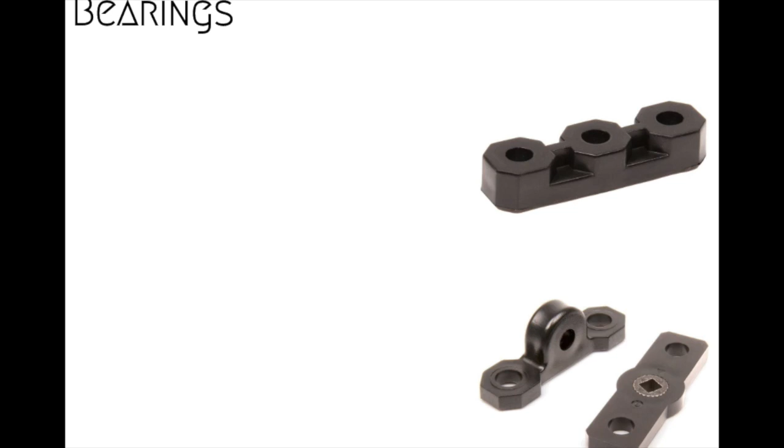First off, there are three kinds of bearings that we talk about on a regular basis, and these bearings are what's going to hold things together for you. So those are Delrin flat bearings, these large ones. They're all about the same size, but they have three holes in them. The holes are round, so what they allow you to do is put a screw through them with a Keps nut on the back and hold them to a metal piece. It supports a shaft which would go through one of the holes, and the other two would be screwed into the metal part, holding it perpendicular.

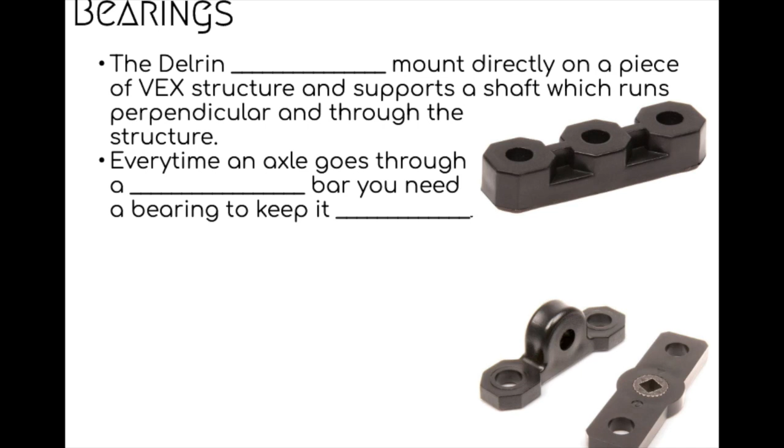Then, basically every time there's an axle that goes through any metal part, you're going to need a bearing to keep it steady and sturdy. Otherwise your axles will wobble. So every time an axle goes through a metal part, you should have some sort of bearing there to support it.

Pillow block bearing mounts, or pillow block mounts, are these guys right here, and they support a shaft off the structure. The screws would go through the two side holes and the axle would go through the center. This has round holes so that the axle freely turns inside of it, which is obviously what you want. It will support an axle so that it's a good half inch or so away from the structure, but you can still keep it from wobbling.

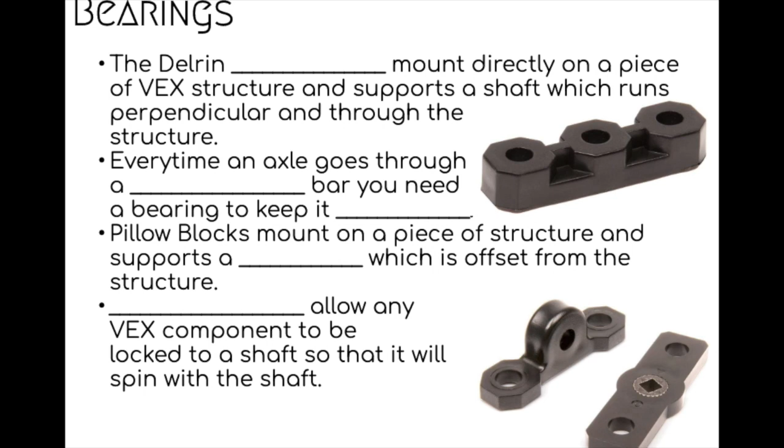And then there are these lock bars here. Notice the lock bars have a square hole in the center, and the reason is that square hole allows them to actually lock onto a shaft or an axle, so that whatever you attach the lock bar to will actually turn with the axle itself. So you can, for example, attach a metal piece to the lock bar, and then the metal piece will spin when the axle spins, and it will stop when the axle stops.

So we have a whole bunch of different kinds of screws. The primary ones we use for building things are called the 832 screws. They are used for assembly of structural parts. Now, I know the picture shows them as silver. We have some that are silver, we also have a bunch that are black. So just because of the color of the screw doesn't mean that it's one kind or another, because we also have the other kind of screws that are also both silver and black.

I know it gets confusing. You really want to look at the head of the screw. The fatter head ones are the 832s, and they are for assembly. You use a 3/32 short arm hex Allen wrench to tighten them. So what that means is a hex wrench has 6 sides on it, and it locks in like a key. Sometimes they're called Allen keys or Allen wrenches, and you spin that to tighten them.

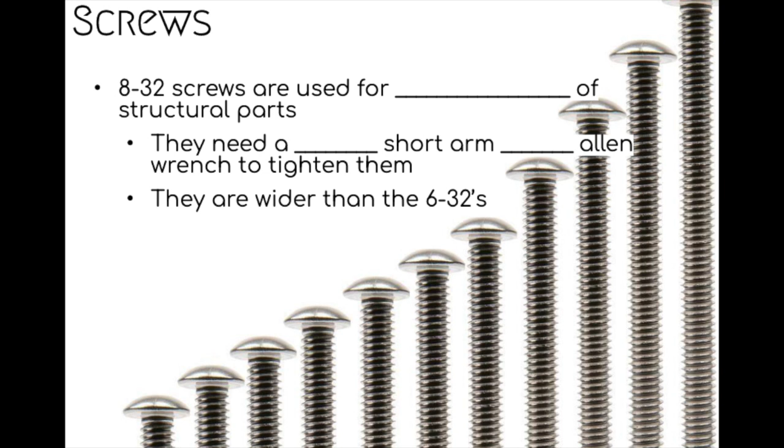And so that's how we tighten up those. They are wider than the 632s. Again, I would look at the head of the two next to each other, you can see the difference. The 632s are actually considered motor mount screws. They're used on motors and the green racks that we have, which have little tiny screw holes in them. Those are for these much smaller screws.

They're thinner than the 832s, and in this case they would need a 5/64 Allen wrench to tighten them. So the 5/64 wrenches that I've bought are the long arm wrenches. So if it's a longer armed wrench, then it's a 5/64. If it's a shorter armed wrench, then it's the 3/32. So 5/64 is the size of the wrench that goes with the 632 screws.

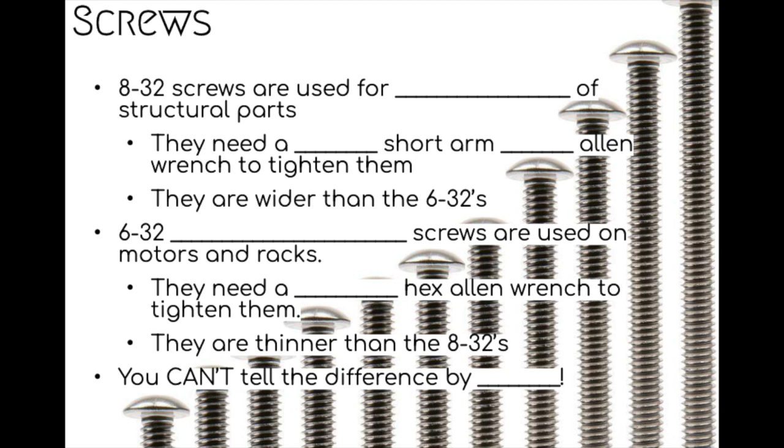You cannot tell the difference between these screws by color. Like I said, we have some silver ones of both sizes, and we have some black ones of both sizes. Unfortunately, you just can't tell the difference without actually picking them up and looking at the heads to see which one's bigger. So there are ways to attach things that don't involve screws.

That would be with these pop rivets. There are two parts: an interior part and an exterior part. When you push the interior part all the way through, it pushes these plastic legs outwards and locks it into place. So when it's on a piece of equipment, it looks like this. You push in from the metal side, which is basically the back of whatever you're doing.

You push it in from the back or the metal side of the connection, and it goes through and locks into place, and the hold's pretty firm. If you notice that they feel really wobbly, it's because you put it in backwards, so use a screwdriver or an Allen wrench to push the center part back out and flip it around and do it on the other side.

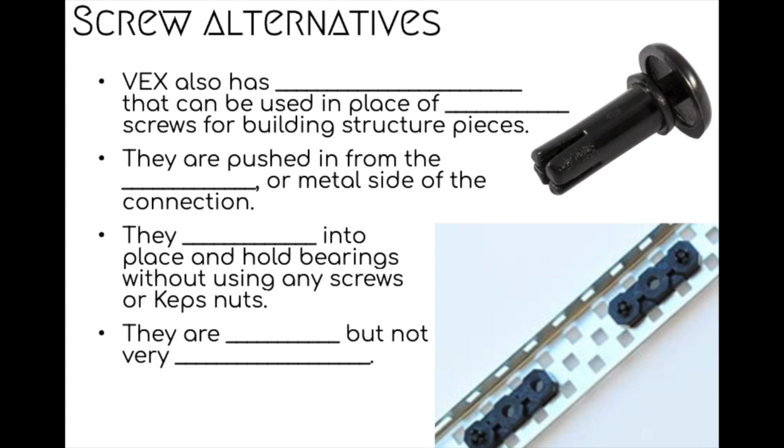So they snap into place and hold bearings without using any screws or any Keps nuts. They are really fast to use, so you can attach things really quickly. However, they don't tend to be nearly as strong as putting something together with a bearing, an 832 screw, and a Keps nut on the back. These should be used in a structure where it's not going to receive a ton of torque or a ton of pulling, so just make sure you're using them in a way that best suits them.

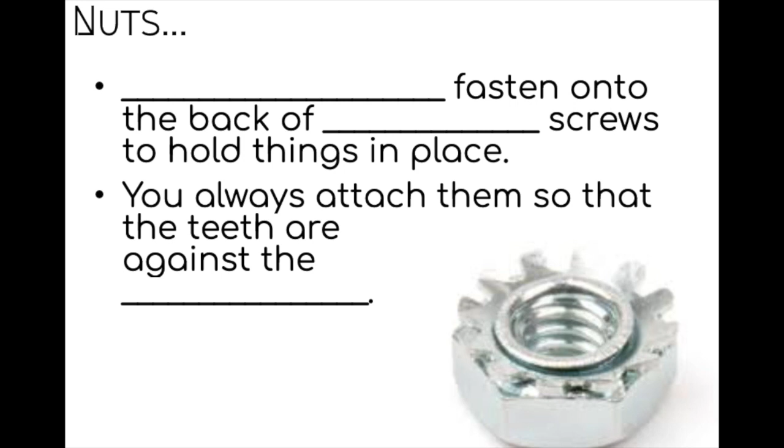Okay, so then we have our nuts. We have Keps nuts, which are used to fasten to the back of the 832 screws. You always attach them so that the teeth are against the metal, so that those teeth are actually correctly gripping the threads of the screw, and the little metal teeth kind of grip the metal back part.

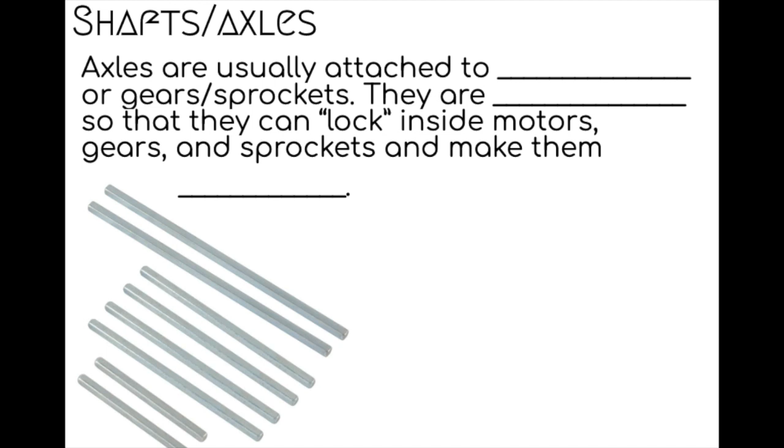So with that come the shafts and axles. Axles are usually attached to motors or to gears and sprockets. They are square, so the ends are not round, they're square, so that they can lock inside of the motors and the gears and the sprockets, and this makes them spin.

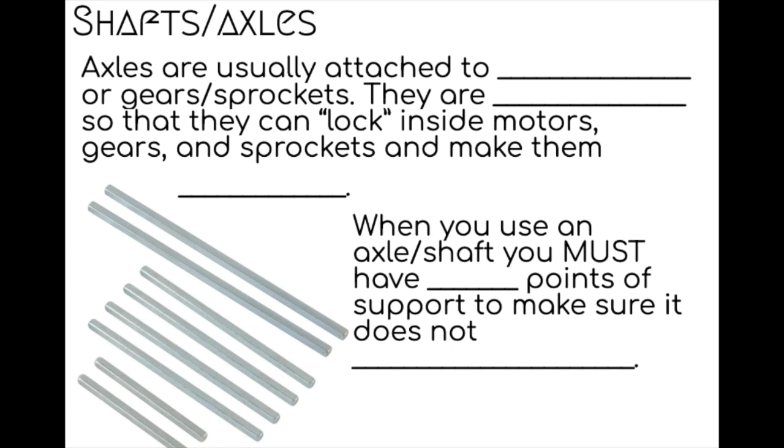When you use an axle or a shaft, you have to have 3 points of support. Remember we talked about that earlier. So it has to go through 3 things in order to make sure that it doesn't wobble, because wobble is bad and your stuff will fall apart.

So shaft collars. Locking shaft collars are the silver ones. They go on a shaft and can be locked into place with a 5/64 long arm Allen wrench, the same one you use for motor mount screws. So the shaft goes through the center. You never put these on an 8-32 screw, it strips up the inside and then it doesn't work very well as a shaft collar anymore.

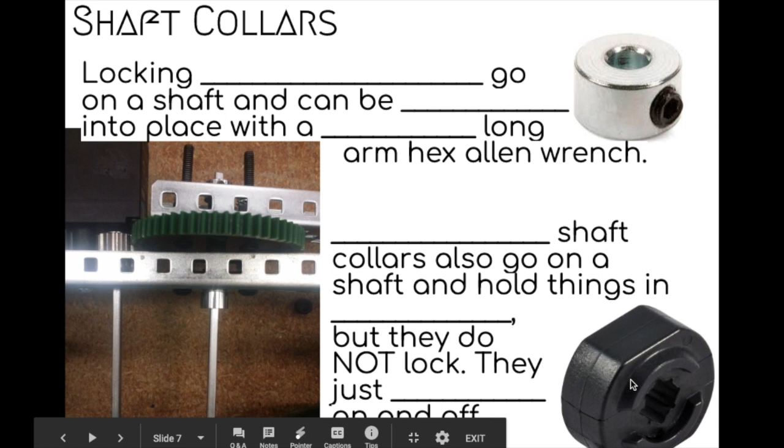You can also use rubber shaft collars. They're actually not rubber, they're more like polymerized plastic, but either way people tend to just call them rubber shaft collars. They also go on a shaft. They hold things in place really well, but they don't lock, so they just sort of slide on and off the shaft.

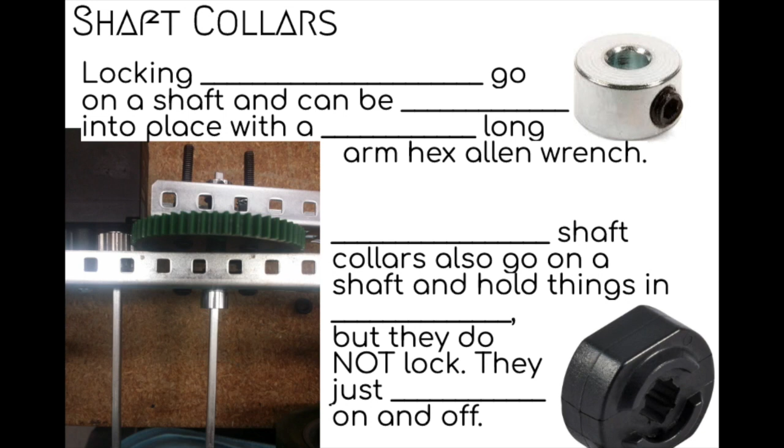So as you can see here, here's a locking shaft collar. If you had one of the rubber ones there, you'd have to be careful because those rubber ones will move around. So if it's going to have a lot of pressure on it, you're going to want the locking ones instead of the rubber ones, but we do have both. The rubber ones are much easier to put on.

So in this case, we're going to ask you if you can see 3 supports in the image. The first one up at the top, we're looking at a motor and a metal bar right there. Then we've got a Delrin bearing right there, which is supporting that same axle, and finally a metal bar and a bearing on the other side. So there are 3 points of support: the metal bar, the bearing, and then another metal bar and bearing to hold it in place and keep it from moving. Now if you look down here, there's a second motor.

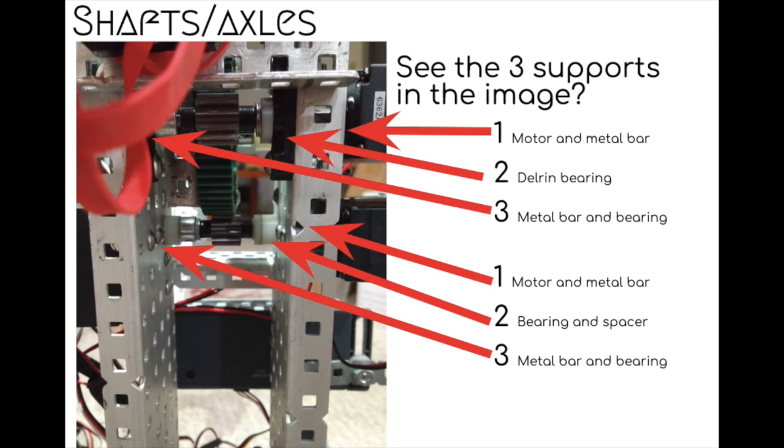Again, motor and metal bar, bearing, and a spacer in this case. They are using some little plastic white spacers, and then a metal bar and a bearing on the other side to hold it in place, and that does a really good job of making sure it doesn't wobble. So those are kind of the basics.

Now we're going to talk a little bit about spur gears, which are these over here. Spur gears basically have teeth that mesh together in order to transfer motion from one axle to another. Then along with that, we have these slightly larger spur gears here. Those are the high strength gears. They are double thick gears, and basically the idea is that these teeth are just stronger and hold together a little better than the regular gears.

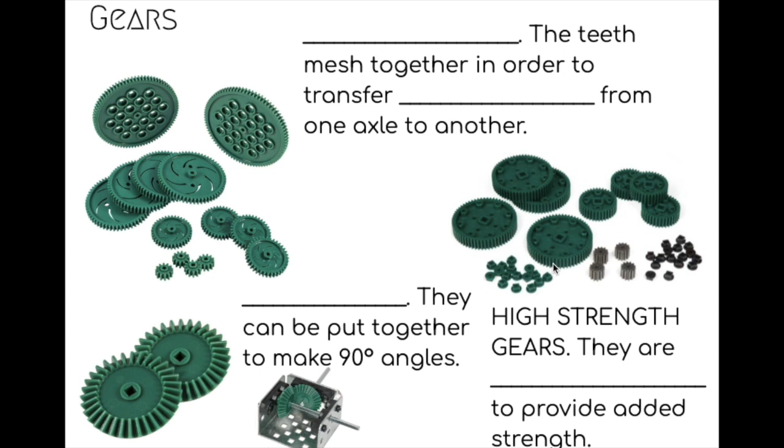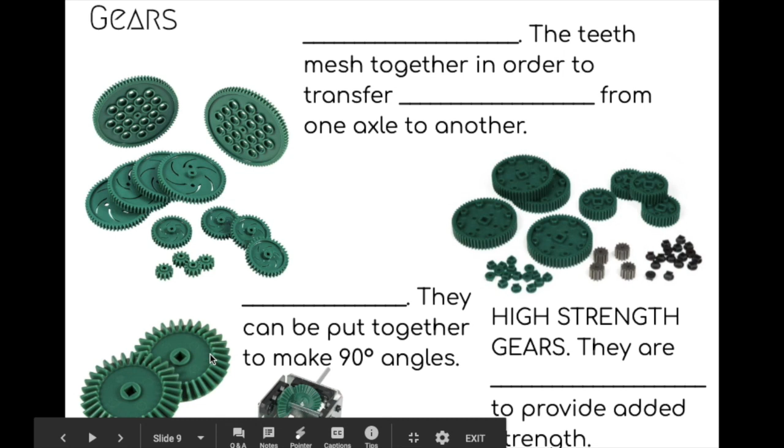These down here are at an angle. You can see here they're at a 45-degree angle, so two 45-degree angles make a 90-degree angle. These are called beveled gears because they are at a bit of an angle there. Then we have sprockets and chain. Sprockets have super deep grooves for the chain to fit into, and they transfer power over long distances.

They come in a variety of sizes so that you can mess with your gear ratios and get more torque or more speed depending on what you want. Each chain also has a master link system for easy size adjustments. What that means is that you can, with like a fingernail, pry these apart and make these bigger and smaller.

So the chains themselves are not to be worn as necklaces, and you're not going to play with them. The problem is that if you're screwing around with the chain, you're going to break it, and we're not going to have any chain. We actually need to build a chain drive. So they only get used for actual robotics, not for screwing around with.

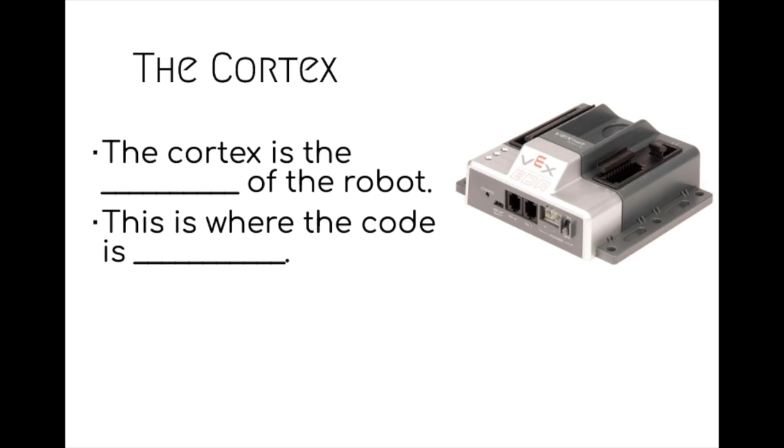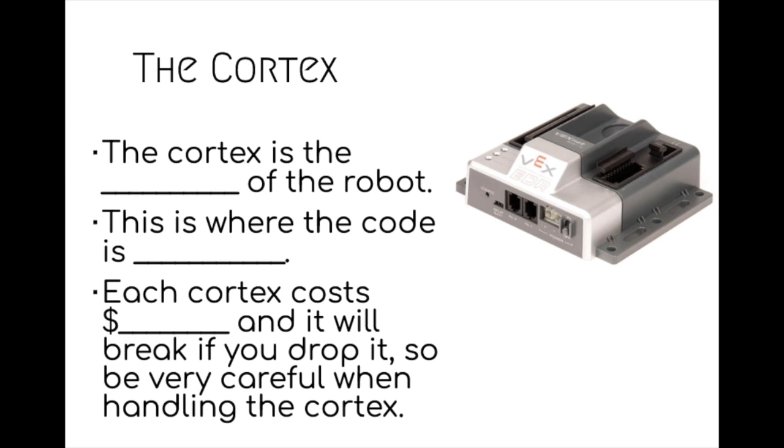Now, we have a cortex. There's a lot about the cortex. Basically, it's the brain of your robot. This is where the code gets stored. Each cortex costs around $250 to $300, and it will break if you drop it, so be really careful when handling it.

Here, we're going to ask you to draw some arrows to show in your notebook where the different pieces are. The cortex has 8 analog ports. You'll notice they're labeled right here as analog ports. So go ahead and draw your arrow in.

It also has 12 digital ports here. Notice they are labeled digital. Analog is for analog sensors, digital is for digital sensors. It has 10 motor ports, starting with 1 and going through 10 over here on the other side. Again, it is labeled motor.

There's a battery connector right here so that you can actually plug your battery in. Right next to it is the on-off switch. So those are the parts of the cortex that you need.

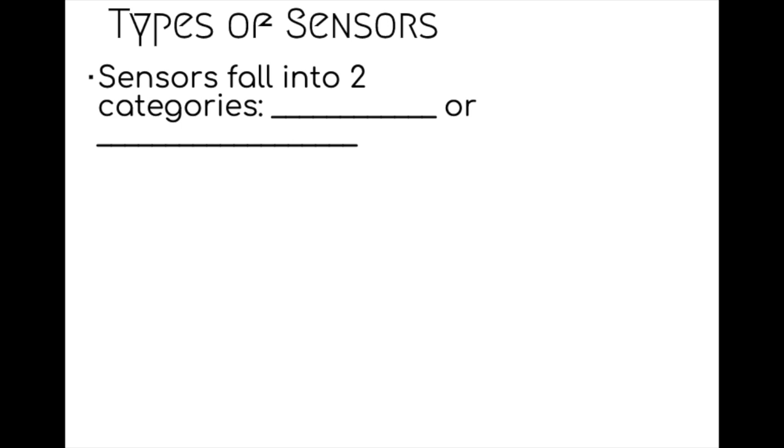Now, we're going to talk about some sensors. We have 2 kinds of sensors: digital and analog. Analog sensors plug into the analog ports 1 through 8. Digital sensors plug into the digital ports, which are 1 through 12. Digital sensors have 2 states, either on or pressed, which are the same thing. If it's on or it's pressed, then it's on, which is basically represented by a 1.

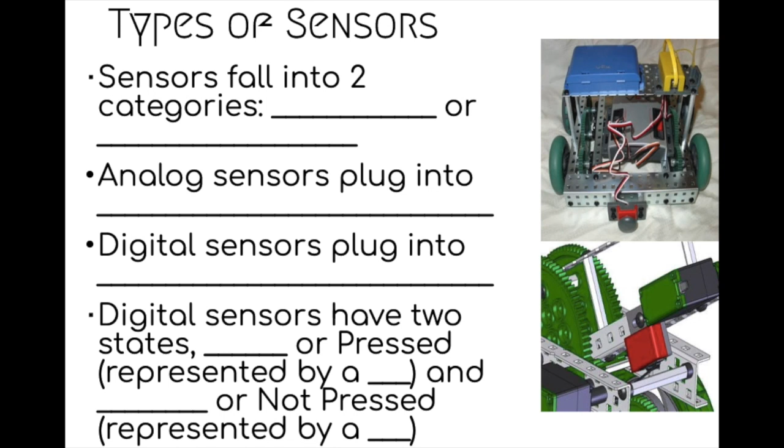And if it's off or not pressed, then it's represented as a 0. On is 1, off is 0, and that's how it reads its signal when you read it on Robot C. We have digital sensors, and we have 3 different types: bump switches, limit switches, and optical shaft encoders. So there's some pictures.

So the push button or bump switch up here, this is the bump switch, and it does sort of look like a push button. It will sense collisions, or you can use it to turn things on and off. This is a limit switch. It's generally used to make sure that a part of a robot doesn't go too far. So this arm of the limit switch, when it's pressed down, can turn off a motor, which will save you from tearing up some of your motors.

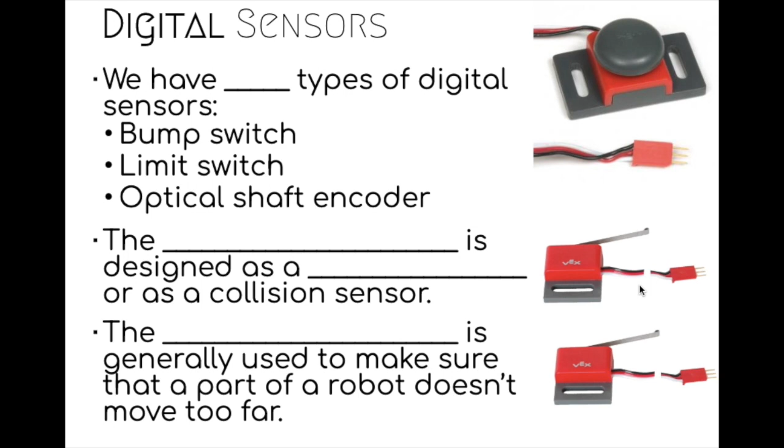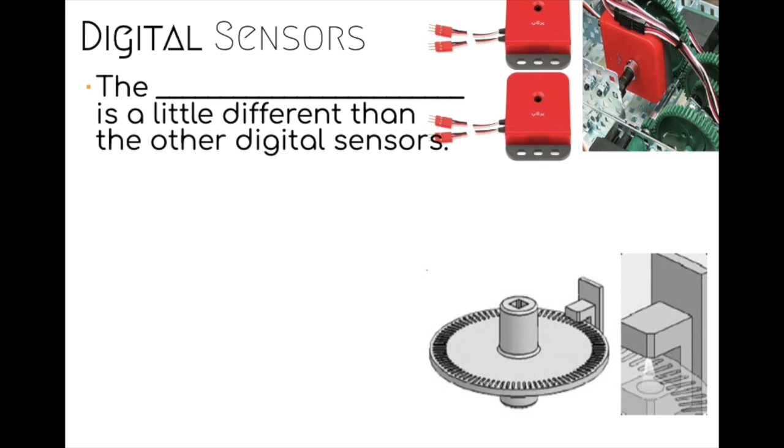So the other digital sensor that we use is called an optical shaft encoder. It's a little different than the other sensors. It counts the number of degrees that a shaft rotates, and it has a really small light that shines through 360 holes. As it turns, the number of holes that it passes are counted. So inside there's this little light, and it counts the number of holes to show how many times it is spun around.

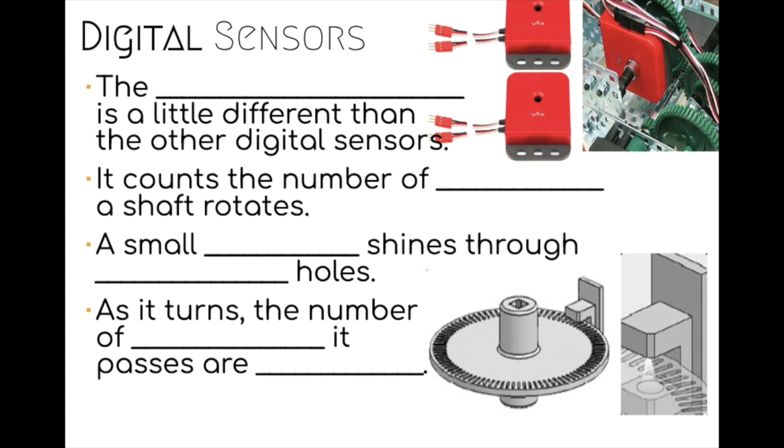So, analog sensors. Analog sensors return one number at a time, just like an analog clock. They give you in-betweens, a whole range of things, not just 1 or 0. It's not on or off. So depending on the state of the sensor, that number can be anywhere between 0 and 4095. Why? I honestly don't know.

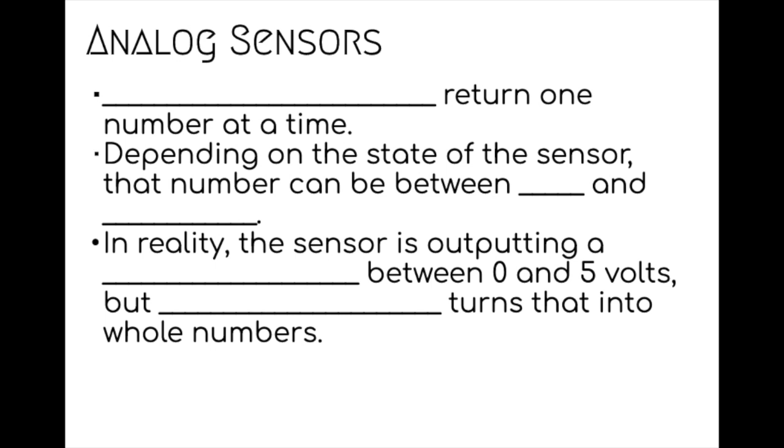That's just the number that it goes up to for all the analog sensors. In reality, the sensor is outputting a voltage between 0 and 5 volts, but ROBOTC turns that into whole numbers, which is how you end up with analog sensors giving you between 0 and 4095 or 4096, because ROBOTC converts the voltage and then gives it to you that way.

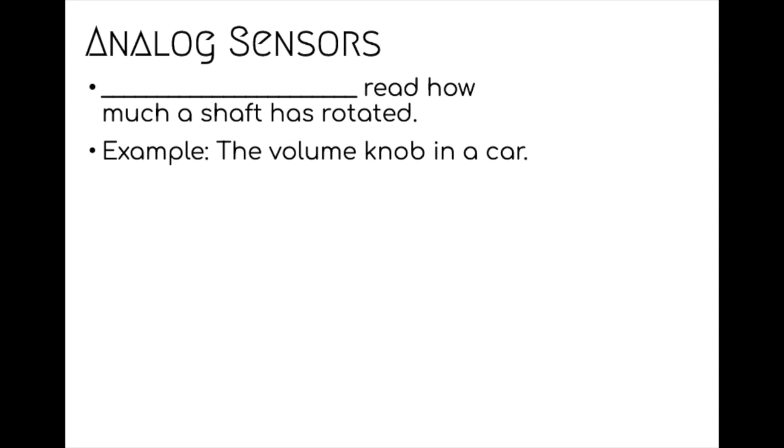So the first analog sensor we're going to talk about here are potentiometers. They basically read how much a shaft has been rotated. Like a volume knob in a car would be a version of a potentiometer. The more you turn the knob, the higher the volume goes, or the lower it goes if you go the other direction. It measures rotation of a shaft between 0 and 250 degrees, and the cortex turns that into a value of 0 to 4095.

Internal mechanical stops are supposed to keep this from going all the way around. Unfortunately, if you put a shaft through here, power a motor, and just let it run, it creates a massive amount of torque. That excess torque against the internal stops will break them, which means you can spin your potentiometer all the way around, causing a dead spot where it doesn't read correctly. You can get around this by not programming in that dead spot, but be aware it exists on most of our potentiometers because they're pretty fragile.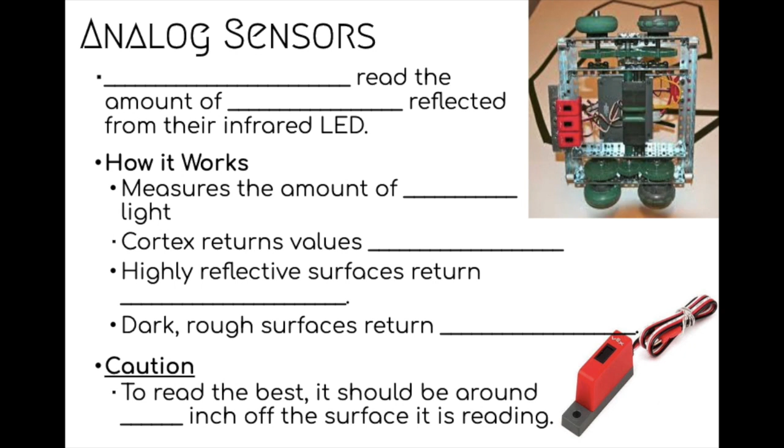Now we're going to talk a little bit about VEX motors. We have VEX 393 heavy-duty motors. That doesn't mean they go faster, it means they break less easily. Motors are set by speed anywhere from 0 to 127, meaning 63 is about half speed.

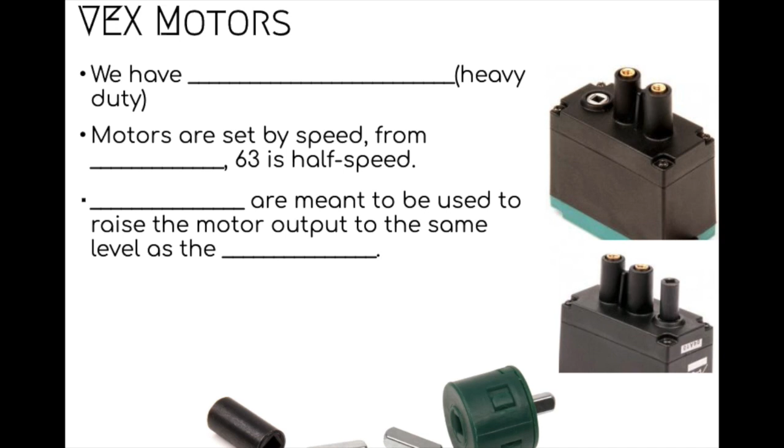Couplers are meant to be used to raise the motor up, and you can see a coupler in this image. That coupler is on there, so there's a little tiny axle that goes into the motor, then the coupler on top, which allows it to come up to the same level as the screws, which is how it lines up against the metal bar. That way your motor doesn't tilt. If it tilts, your axle won't be straight and you'll get some really interesting motions.

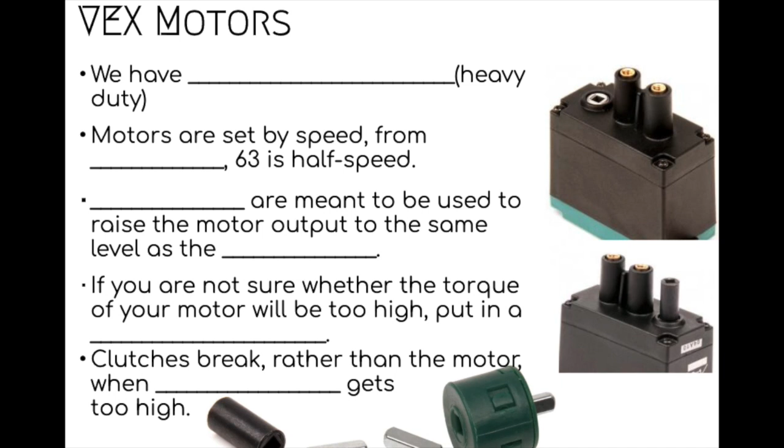If you're not sure whether the torque of your motor will be too high for what you're doing - say you're trying to raise an arm on a bar, or move something slowly - you might want to use a clutch. These are the green guys right here. The clutches are designed to break, so the clutch will break rather than the motor itself when too much torque is added. If you're trying to lift something super heavy, put a clutch on there, and that way you won't tear up the gears inside the motor. Instead, you'll just tear up the clutch, which makes it useless after that, but at least you didn't destroy the motor. Clutches are cheap.

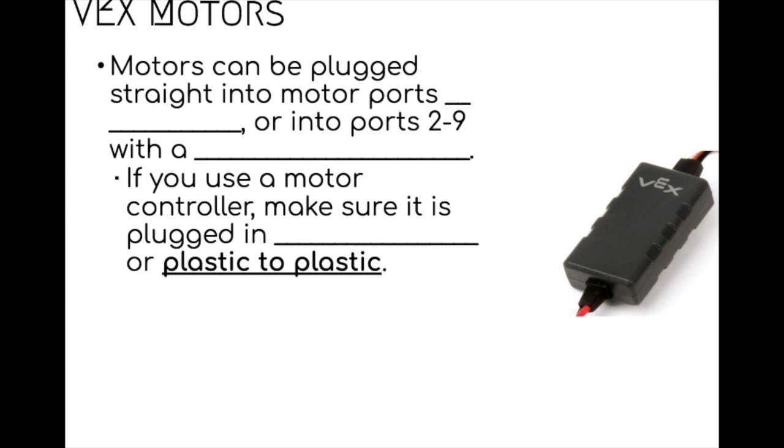Motors can be plugged straight into motor ports 1 and 10. In those ports, they do not need one of these guys off the side here, which is called a VEX motor controller 29. So motor controller 29 is the name of this.

When you plug them in, you have to make sure you either see plastic to plastic or metal to metal. If you don't, you've plugged them in backwards and you're shorting out your motor, and you could very well destroy both the motor controller and the motor itself. I've actually had a student set a motor on fire doing that - they just plugged it in backwards so it was metal to plastic, and I'm like, what is that smell? Turned out they had set their motor on fire.

So don't do that. It applies to extension wires as well that you use with some of the sensors - like you want your bump switch to be really far away from the mechanism. You'll use an extension wire like these guys here, metal to metal always, or plastic to plastic. If the fronts match up with the metal, the backs match up with the plastic.

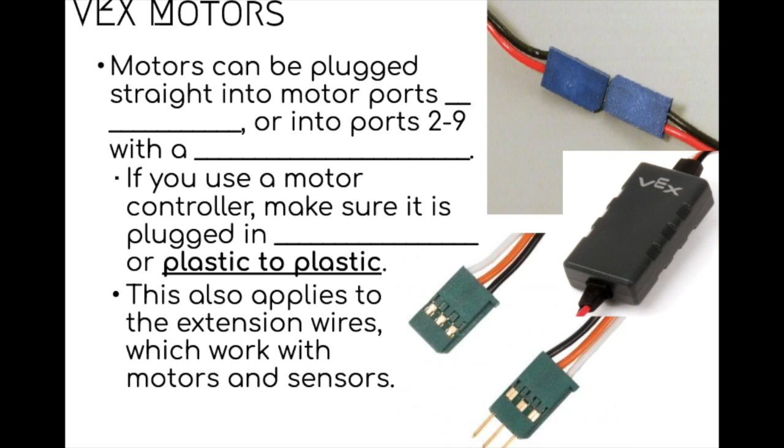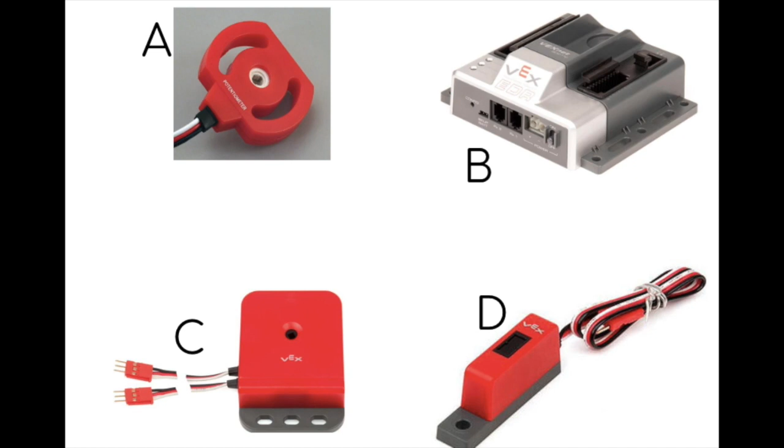So those are pretty much the basics. From here on, you should be able to answer some basic quiz questions and tell us what these different pieces are. Make sure you can do all of that and answer these questions in your notebook, and be ready for our parts quiz.